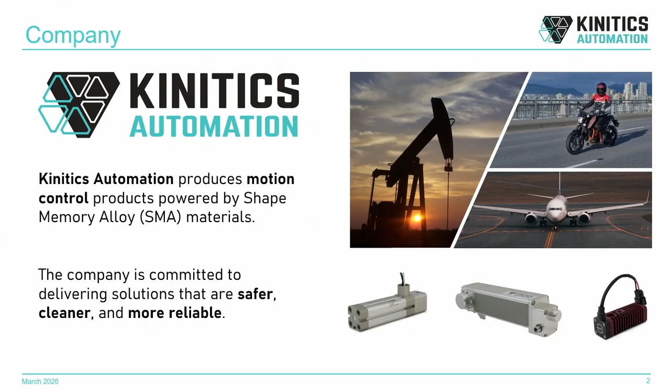I am Dean Pick, president and founder of Kinitics Automation Limited. Our company produces industrial grade equipment, primarily for motion control and automation, using our platform technology based around shape memory alloys. We've placed this technology with customers in industries including advanced manufacturing, aerospace, and transportation, but I'm here today to talk about our applications in the energy sector.

For those unfamiliar with venting pneumatics, we're talking about a widespread industry practice in oil and gas which uses the gas in the pipe—methane, natural gas—as the driving gas to run pneumatic equipment. This opens and closes valves that permit the flow of gases and liquids through pretty much the entire value chain: upstream production, separation, midstream compression, downstream pressure letdown stations. There are millions of these devices throughout industry.

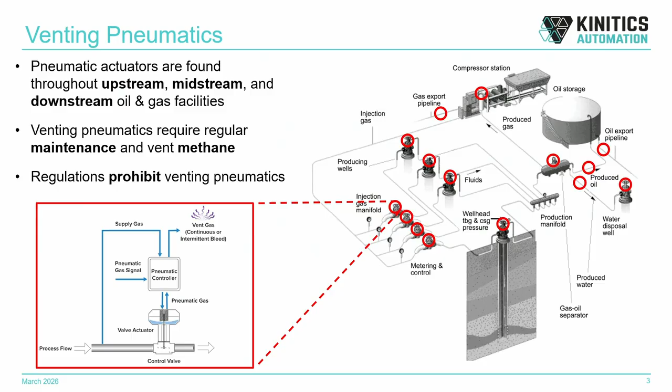This was a practice started since the inception of the industry, and it continues today even in the face of mounting regulations. There's a lot of hesitation to move away because of that sunk cost mentality and the lack of return on investment—it's hard to justify. So operators are, very understandably, delaying it as long as possible.

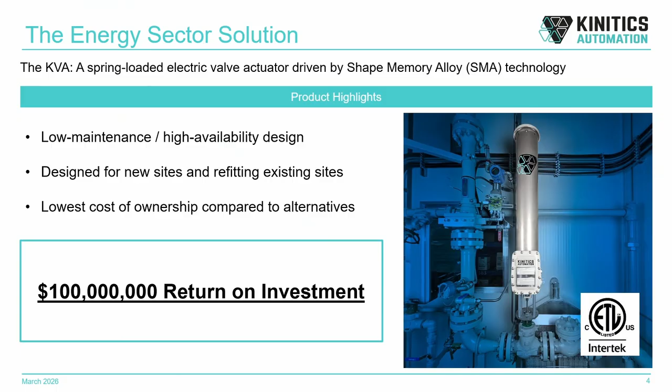So we worked for the last five years with the Canadian gas industry to bring a solution to this problem to market. What we set out to do was develop the best valve controller we could, and we came out with a certified device for hazardous area locations that can mount on existing valves. We are not a valve manufacturer, but we've produced a product that sits on top of a valve and operates it—whether it's existing brownfield equipment, where we can mount in situ,

or greenfield applications, where we can pre-attach valves of any type to our product in valve shops and fabrication shops before deployment to sites. With this design, which I'll elaborate on in later slides, we've come up with a solution that provides high uptime, no maintenance costs, and through a combination of low capex and low ongoing costs, delivers the lowest total cost of ownership against the competition. Through this case study, which I'm presenting today for the first time, we've unlocked a $100 million enterprise opportunity for medium to large operators.

So how does this device work, and why is it different? What we've done is take the pneumatic spring from those pneumatic actuators and build a different driver mechanism around it. Our proprietary technology is based on shape memory alloy, which we use to replace the diaphragm actuator so that the spring still does its job—providing the thrust which closes the valve and keeps the pressure behind it.

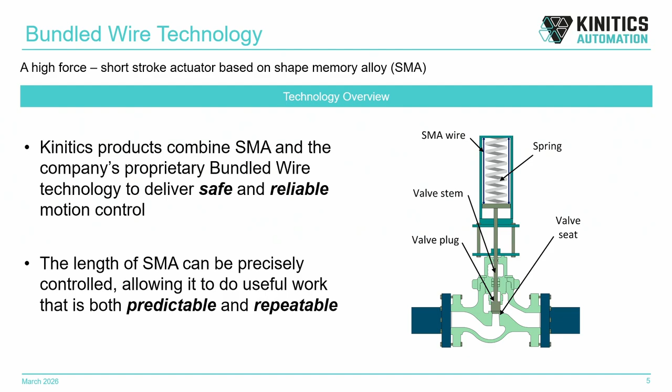This allows us to retain that essential fail-close feature. What we've done, though, is replace a chronic source of maintenance and problems—the diaphragm actuator itself, which is a pneumatic system—by using the properties of SMA material to oppose the spring. So it's an electric actuator, and in its natural, idle state, it's the spring that provides the closure thrust, just like a pneumatic actuator.

However, when you want to open or operate the valve, these wires act like conductors. We can connect to a variety of voltage or power sources—we have products for 24 volt DC for remote sites, and devices for 120 volt AC. We pass electricity through the wires, and they excite a material change which literally realigns the molecules, allowing us to pick up the spring and open the valve. It's not just open or close, bang bang—we can actually control how the power flows through the material to get extremely fine positioning control.

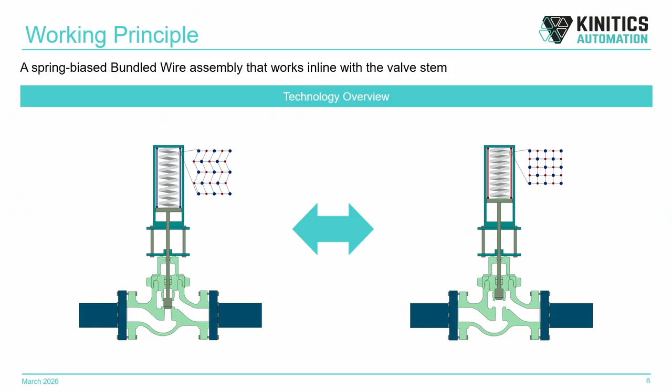It's a technology we've proven out through millions of cycles, and we've arranged it in line with the valve stem, so there's no metal-on-metal contact and no lubrication points. We maintain a high quality wiper seal just to keep environmental dust and debris out, but otherwise it's a floating actuator. Through this design, we're able to provide a highly reliable system that can cycle millions of times, and in the event of any site disruption—power, signal, you name it—you can have the confidence of spring closure, which is essential for your facility designs and HAZOP studies.

So the case study that I'm presenting today, and we're really excited to be doing this, is based on our first US field deployment on a midstream company. We were connected to the Rose Rock Bridge program through a cohort program running between 2025 and 2026, a fantastic program based out of Oklahoma.

This allowed us to connect to midstream customers within and around the Oklahoma area. And we came to site here, which was a gas compression site with 3 engines running. We were brought in on the first 2 problems here. They were struggling with these gas lines, wet gas, freezing up in the winter, causing their entire engines to drop out. Small valve controlling a big asset, single point failure. And of course, these were also venting pneumatics, which was a compliance problem, also releasing their own product to atmosphere.

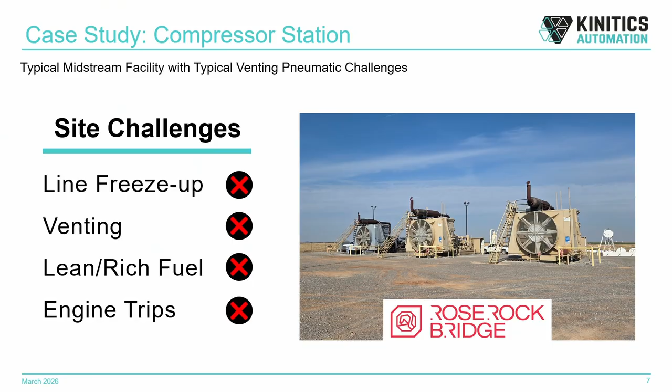What we came to appreciate over time since deploying, though, was that these customers were also suffering from basically bad fuel mix, air fuel mix going to their engines, constantly running lean, constantly running rich, and disruptions that were happening when these engines were coming on and offline, which were tripping the entire site. Basically, one engine comes up, suddenly there's a disruption on the fuel line, all engines drop out, whole site goes down. Big problem that we became aware of after the installation.

So we came in on a value proposition and an ROI on direct savings. This would be the costs of not having to deal with the maintenance headaches of these pneumatic devices in the field. But what really was truly a discovery for us and our customer was the device was just better at doing its job, valve control. What does that really mean?

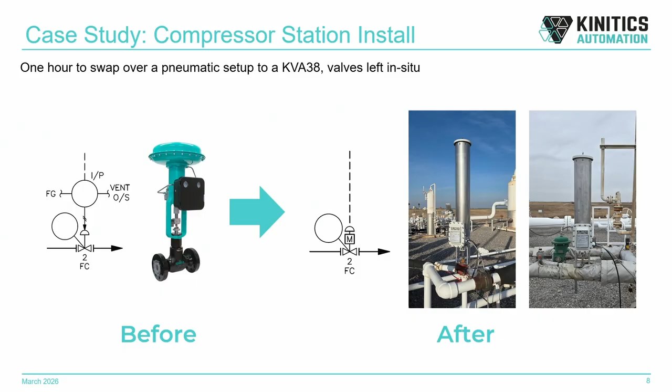That means that the pneumatics, the kind of electric to air conversion, was introducing these small delays and latencies in their process control, and that was manifesting into swings on their fuel line. So these types of equipment and even a lot of electric drives have something called deadband. There's a hesitation and sometimes an engineered delay so that they're not constantly consuming gas or consuming electricity or inducing wear and tear. We don't suffer from any of these things.

So what we have been able to do is provide them with excellent control. Tiny micro adjustments, very fluid in nature. If anything, it's almost like taking that 4-to-20 analog signal and actually delivering analog or fluid motion at the valve. And by making those small micro adjustments, we were able to provide them excellent position tracking, which would dampen out the on and off nature of the compressors naturally coming on and off.

By doing so, we eliminated their engine trips, which otherwise would require an operator or a maintenance individual to jump in a truck, go deal with a site problem. Site is down. At the same time, they were monitoring their air-fuel ratios and telling us, hey, look, we're actually getting excellent fuel delivery of these engines. They are running happier, they are running better. We believe, through this extended use of your equipment, that we can potentially extend the life of these high-value compressors and basically defer the major overhaul and maintenance cycles, which add up to significant dollars.

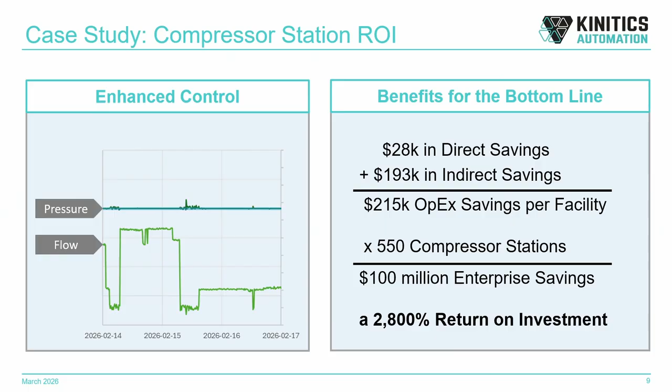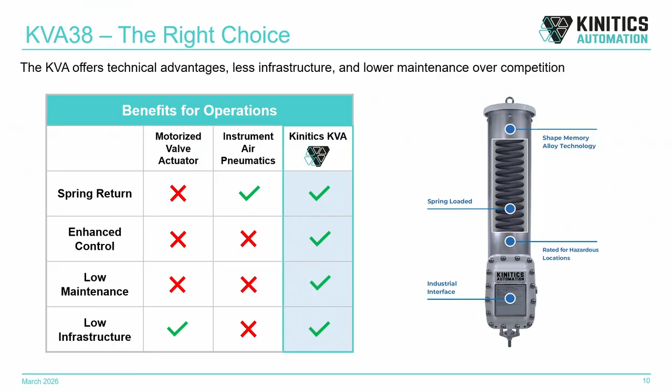So, how do we compare to the market, to the competition? What we have done is taken the best of pneumatics, which is the fail-close mechanical return spring. We've also taken the best of an electric drive, which is the low infrastructure requirements. You don't need all the equipment that you would typically need to run an instrument air system at your remote sites. You don't want to have a man or a woman present constantly maintaining this myriad equipment required to deliver air. In addition, we are able to provide that enhanced control that I was speaking to on the prior slide to provide better control of your control loops, better control of your equipment, in addition to the low maintenance touch of our devices. All this adds up to the next generation of process control equipment for your sites.

Notably, that customer that I was just highlighting on the case study, within a week of installing the first set of devices at that station pictured earlier, they went and took another device off the shelf and installed it at a site one week later on a single pressure letdown station, even enhancing that ROI further, not requiring two devices to deliver the same returns.

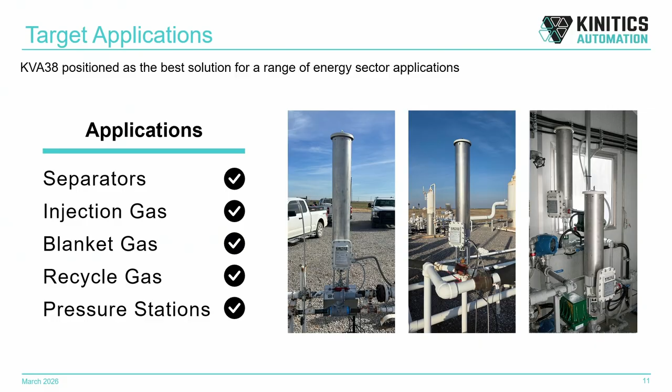They didn't even tell us they were going to do this. We had recommended, hey, we're here, we want to be on site, let us help you install it. They just called us afterwards. This was actually a picture snapped by one of the operators there who said, oh, hey, by the way, we've got another one in. No sooner had they done that, they installed on another site, and we're going to get our 4th site up and running this month with them. So we're seeing an accelerating uptake. They're realizing the benefits, and this is a positive story that we would like to share and help other companies realize.

We're happy to count many customers as our stakeholders and customers on our journey. We got our start in Canada through Emissions Reduction Alberta, CRIN, as well as NGIF. We're currently working within the Rose Rock cohort this year to basically deliver results both for the customers, but as well provide economic benefits to Tulsa, Oklahoma, and the surrounding region. One of our largest investors is the Natural Gas Innovation Fund. I'm joined today by our director, Akil, who is part of that organization, and we count quite a few of the LPs as our current customers.